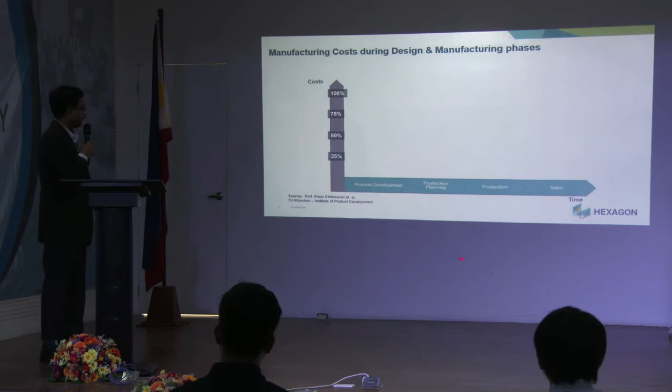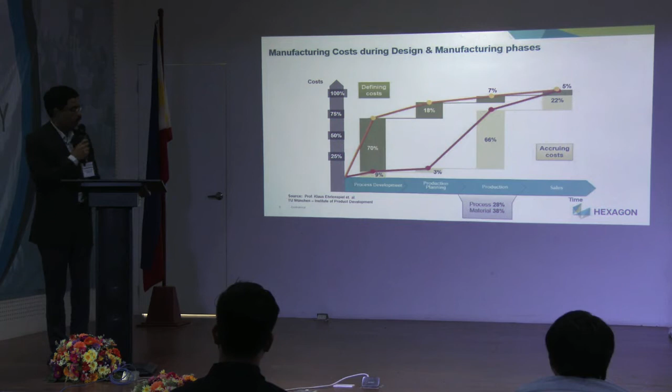So coming to the manufacturing, this is what is happening now. On the manufacturing, if you look into the total cost of any product being used, this is the timeline, and this is the cost of it, and you will notice that

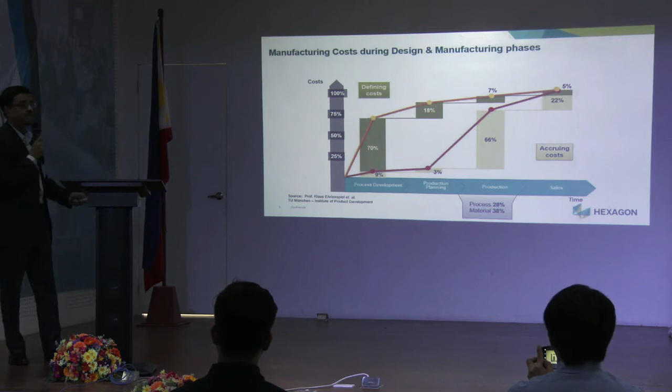this is the overall cost, but what you see is 70% of the cost is taken in 9% of the thing. That is, during the design stage, the total cost decided is 70%, 88% is decided even before the first prototype is made. If I am going to make a pointer like this, 88% of the cost of this product is already decided during design and the first step before you make it as a prototype.

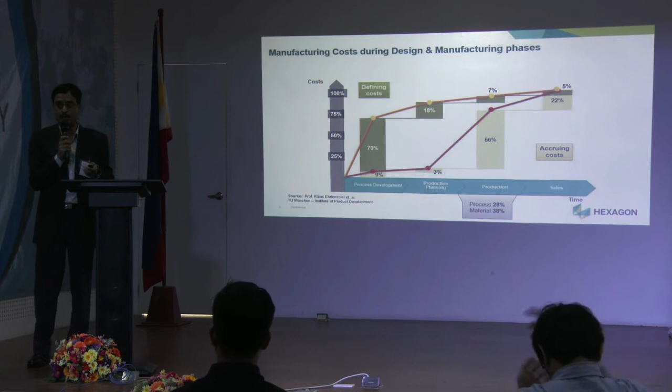So MSC is today helping in all these segments. So what MSC is trying to do? What we are trying to do is bring simulation to your competitive advantage. So move the shop floor, many people try many things in the shop floor as testing, and move everything to the computer.

So MSC today has got many tools, all the way from, we do not have anything for casting, but other than that we have stamping, rolling, forging, you name it, everything we have today. But in my presentation today I will concentrate more on additive manufacturing.

Whatever you do for additive manufacturing, the first step is a part. I'm going to explain with a single example, easy to understand. These are all the different approaches. The first step is to create the startup part. Let's take a bicycle, and we'll talk about two parts: one for the seat, the other for the fork. One is metal, the other is plastic, because today additive manufacturing involves both plastics as well as metal.

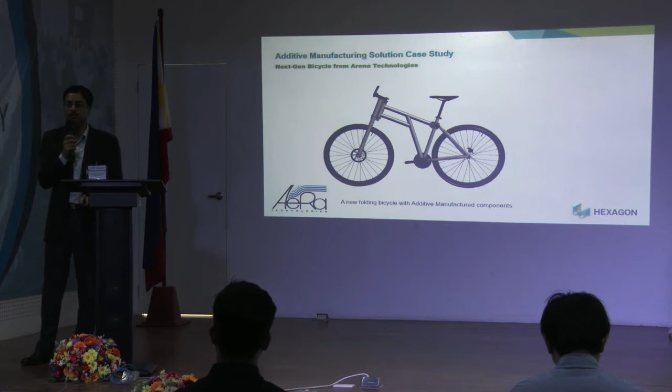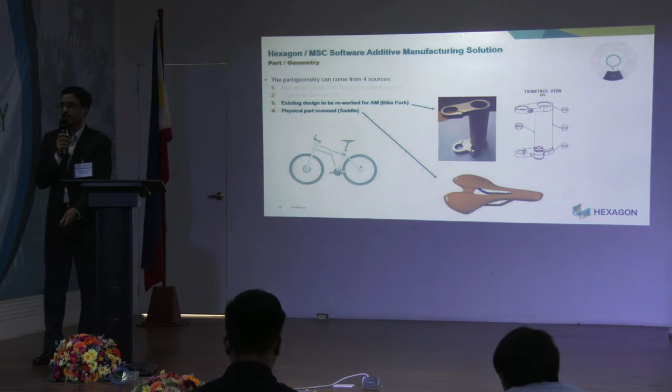So what we are doing on the simulation side, there are two things we talk about: bike saddle and the fork. The first step is when people do these two things, we start with saddle and fork. The first step is we do the optimization of this.

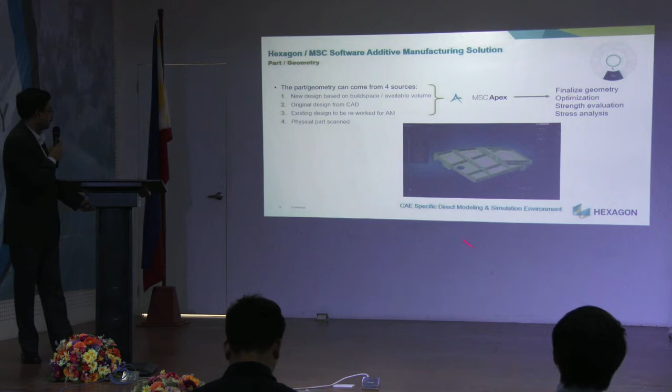We do the optimization. The first step is CAD, and once you get the CAD portion, you can do the so-called cleaning of the geometry. Then the second step is to optimize using topology optimization.

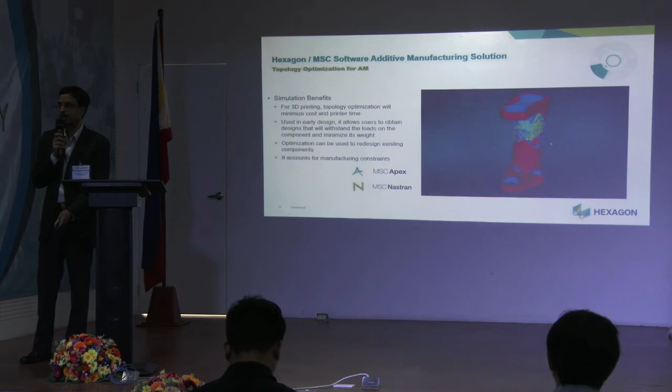For example, on the fork, you take the part, you can get scanned data, and then optimize it. Today when you do 3D printing, you do not need to print it like you previously used to. This is the optimization of the part. After you do this, then you test for it.

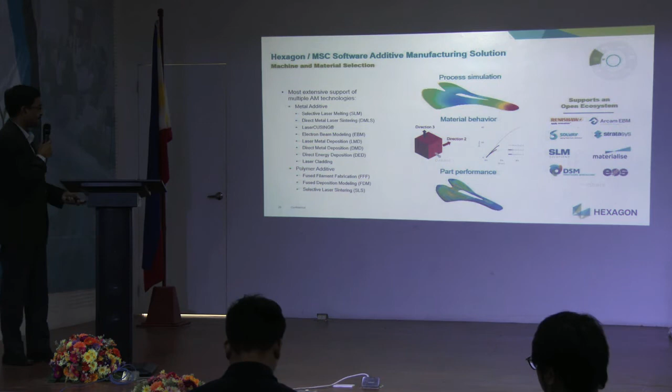Then comes the material selection. The material selection can be two portions: number one can be plastic, or on the metal side. On the saddle portion, we will use plastics. So on the material side.

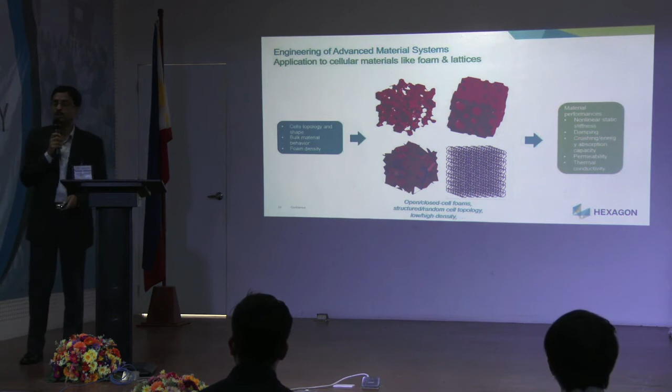MSC has got a big solution on the material side. The material solution itself is a big science. I'm not going to talk about this in detail, but it is possible in MSC software to create your own material. For example, you can take the base, put whatever type of material you want, add lattices, and create your own virtual material. After that, you can test it virtually for various material properties. It's possible today, the technology is available.

MSC also provides a huge material database. When people do simulation, the biggest problem is material properties. MSC provides a long list of material properties from various suppliers that you can choose from, or you can create your own materials. Even the latest material tables are available as part of the MSC solution.

The next step is process optimization. Once you've selected the part, which can come from CAD or be scanned, you can print it on a 3D printer. But before you really print it, you can virtually print it on the computer and see how much distortion there is. We can do so-called warpage compensation on the geometry.

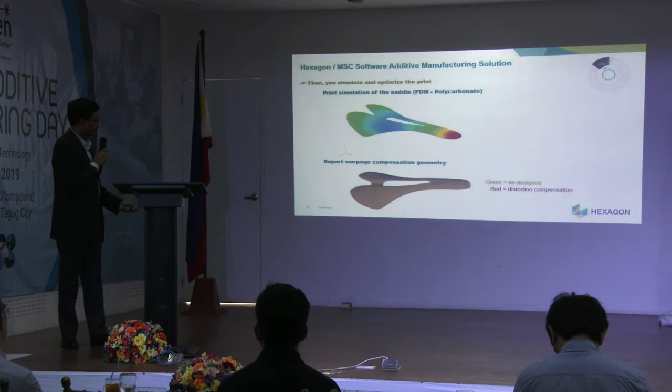After printing, the part behaves like this. You can put a negative on the CAD portion, and that can be used for the printing. This is the printing on the plastic, the part getting printed. On the computer you can see the part, and after it's printed, you can see in the computer how the warpage and final parts are going to look.

During the printing process, many questions come up. You have the answer—you can test for various conditions in the software for various requirements.

Then comes metal. I showed plastic, but when it comes to metal, we have tons of experience in additive manufacturing for metals. We are seeing today people build a 3D metal part on a printer, which is very expensive. Then people use titanium—there are so many metals printed. It takes a very long time to print.

After the part is built, during printing the part gets broken, especially if it's thin-walled. It takes a lot of time even to provide support structures—how to optimize? People make support structures and spend so much time: one day to print, three days to machine the support structures. And after you print, the part doesn't look like this—it looks like this. It's all waste.

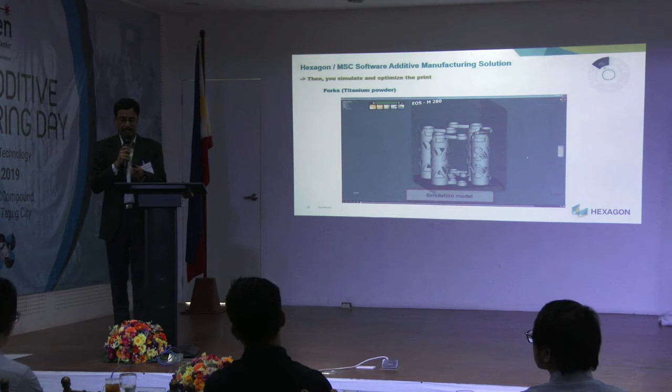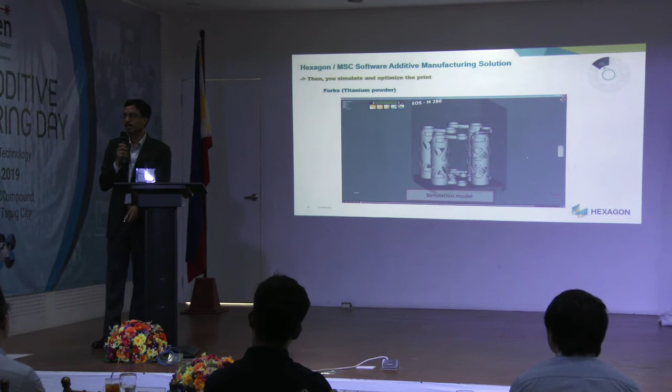So this is how the software works, okay? This is the part that comes up, and this is the part. And these are all the support structures you can develop, the optimized support structures within the software. You can do it.

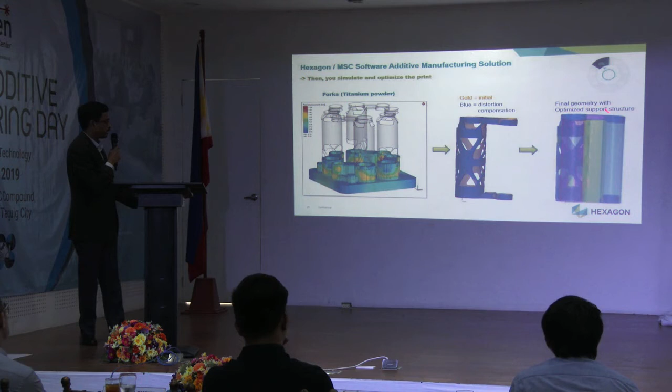During this process, what we have is called distortion compensation. Okay, suppose the part has to be printed like this. After we print, we remove the base, and the part is going to be like this. What we do is take the deformed portion, put it in the CAD like this, and start printing it from the beginning. So the part starts like this. After you remove all the base and clean it up, the final part looks like this.

So this is the approach. You don't need to do much. Okay, all these things are automatically done within the software. Then we have automated this, the automated distortion compensation. And today lattice structures are very popular. This is the part, and this is the support structure. You can use all these lattice structures for 3D printing.

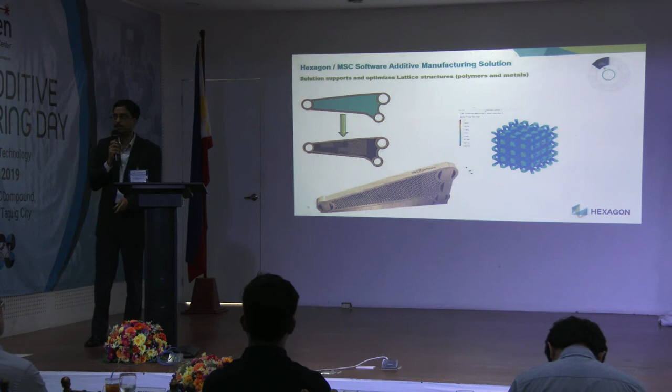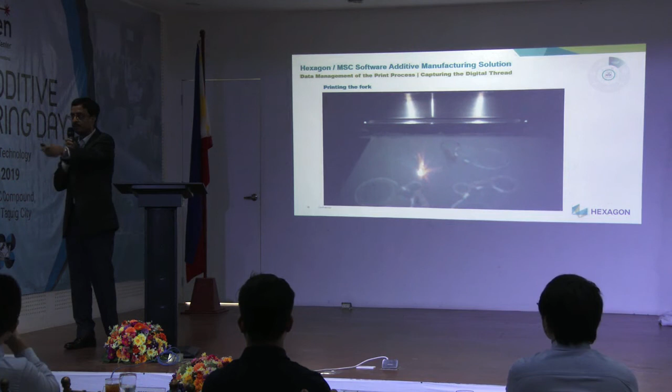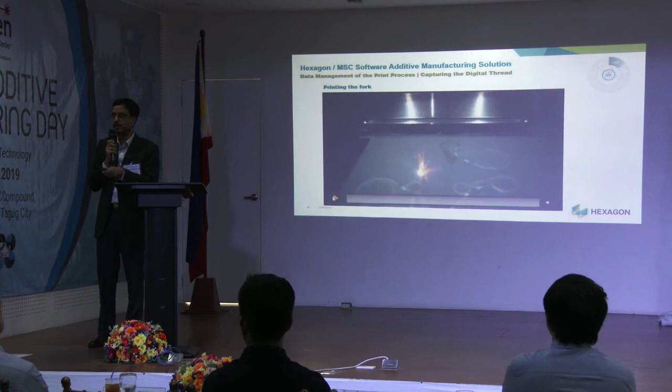Okay. Then the first time you can do everything right in the computer, and this is the plastic part being made. Can you click the video? Yeah. So this is the part being manufactured. Now the video is coming, but this is what you can really see in the computer before you make it. It's okay.

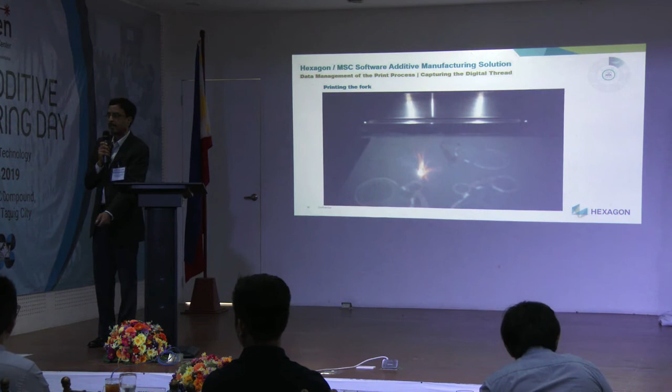Yep. Can you move to the next slide? So not only that, you can have complete management of the process. If you have done a 3D part, plastic, whatever, you can capture all the knowledge base. What you did 3 years back, when another part is coming up, you don't really need to re-investigate. You can use the whole thing. This is the management of this.

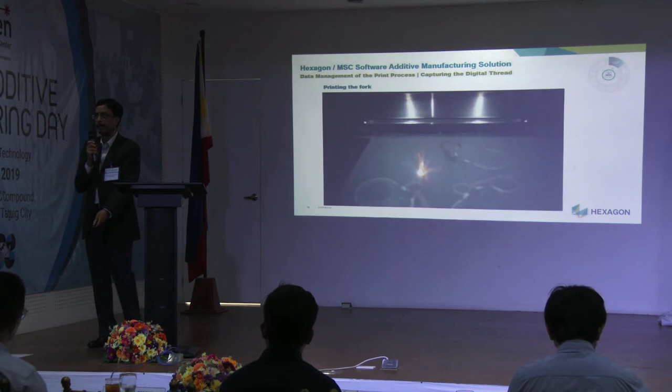We have tens of thousands of customers, educational, academic, research institutions. Today, additive manufacturing is really becoming mainstream. I work and live in Singapore. The country is small, but GDP-wise it is much bigger. Every 10 years, Singapore does a reinvention. 30 years back, Singapore had a lot of mold making companies. Today, there is not one single mold making company in Singapore. Then they moved on to electronics, into the fabs. Today in Singapore, the main thing is additive manufacturing.

There are 3 things Singapore concentrates on today. Number 1 is additive manufacturing. There are so many companies on additive manufacturing, and one thing is common: all of them use very expensive machines, but they also use MSC software. They test everything in the computer upfront before they send the part to manufacture, and that way they gain competitive advantage. The others are driverless vehicles and biomedical. It is true that additive manufacturing is mainstream. Don't leave that gap. Singapore always thinks 10 years ahead. If you go to Nanyang Poly, they have a huge center with so many machines, but one thing is common: MSC Simufact software.